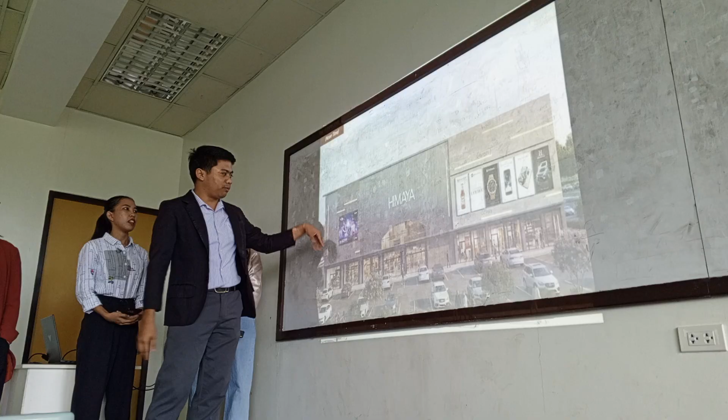So for the next slide, we have it for the night time, which is for the evening. So this is a little bit of information or inspiration about our perspective.

The design of the Himaya building suggests a sophisticated blend of modern industrialism and tropical minimalism, as you can see in its facade. It manages to look imposing yet approachable, bridging the gap between a high-end department store and a community-centric hub. The design of this building is inspired by an industrial elegance concept.

Then over here, as you can see, this is the central glass arch. It is a modern nod to traditional town squares or grand entryways. It breaks the rectangular monotony of the building, acting as the heart that draws the eye inward and showcases the activity inside.

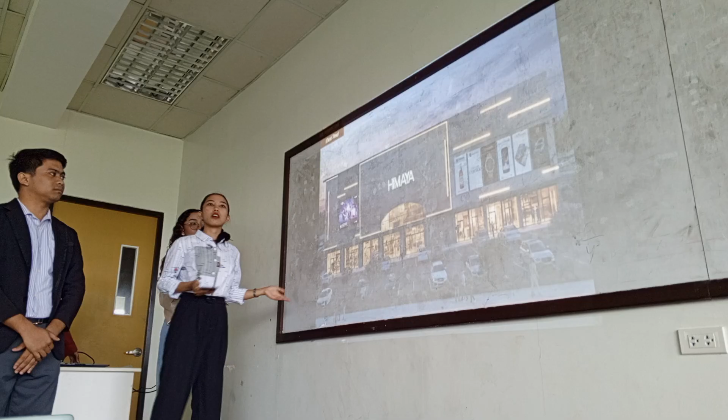For this part, the staggered horizontal light strips are inspired by modern technology and suggest movement. These lights make the building look like a glowing motherboard or a high-tech terminal, suggesting progress and energy.

For the name itself, Himaya is a Visayan or Cebuano word which means glory, praise, or bliss. The bright glowing light and prestige feel of the stone facade align with the idea of something glorious and celebrated. That's how we came up with the overall concept design for the perspective of our building.

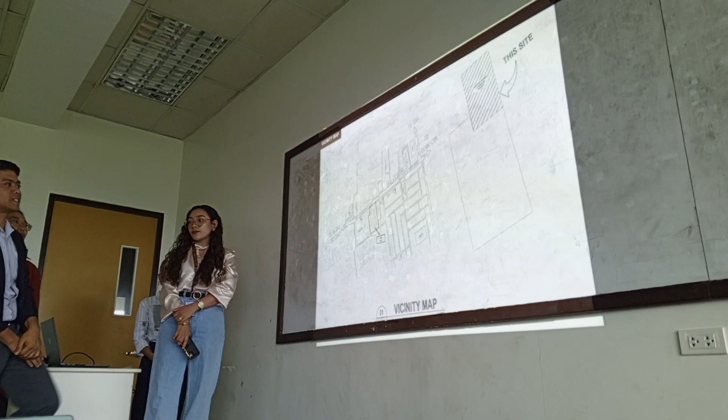This is our vicinity map. It is where our building is located, in the area of Toyota and in front of DGT or Davao Global Township. So why did we choose this?

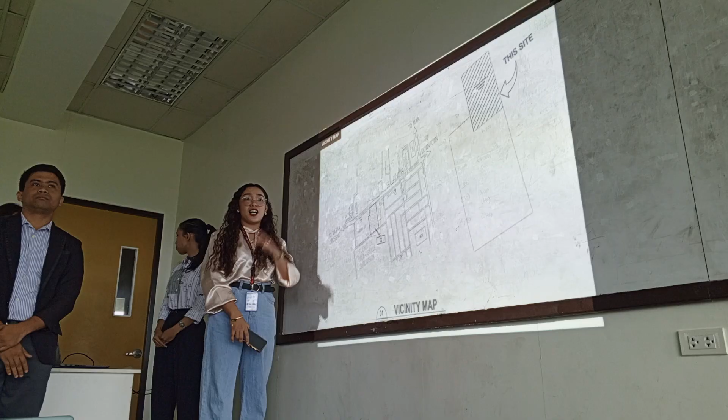It is actually very strategic why we chose that, because putting a commercial building especially near or in front of DGT is significant since we cannot deny that DGT is the growing BGC of Davao City. It is considered a premier, bustling, high-traffic intersection linking the major districts.

As you can see, there are a lot of people going to DGT. This location offers high visibility for the customers. If you are the client, there's no need to spend a lot of money on advertisements because it already offers high visibility and easy access.

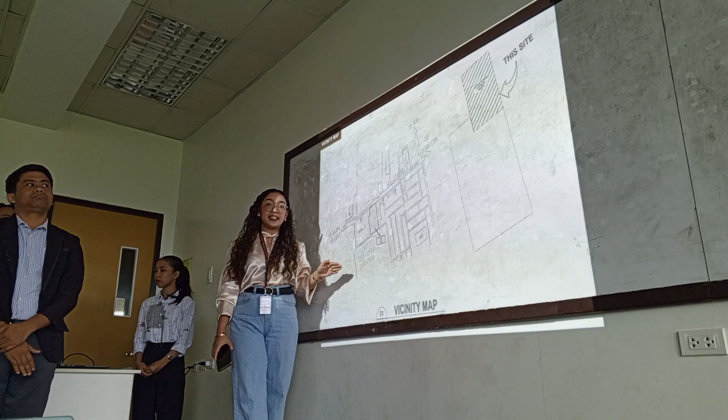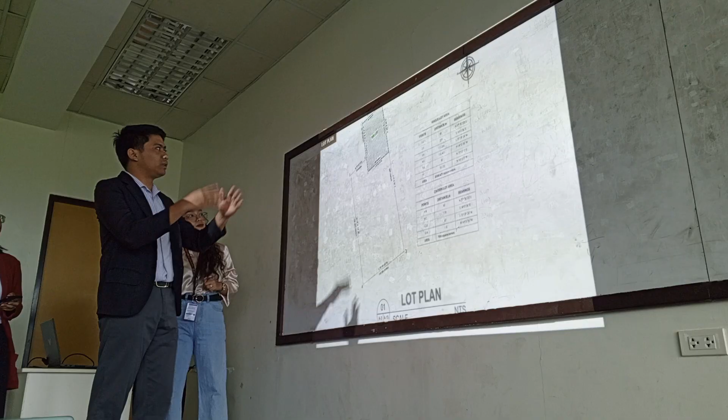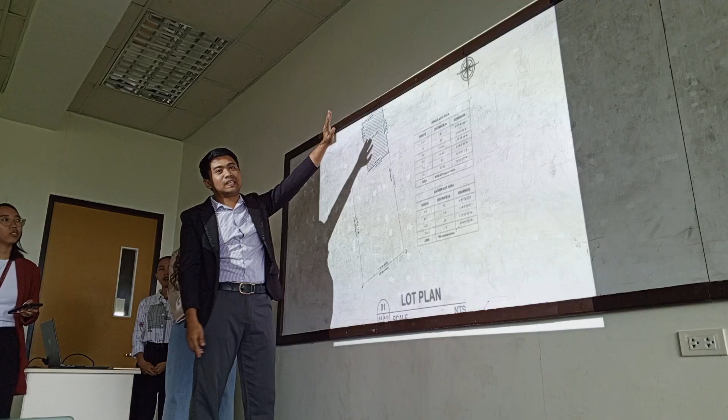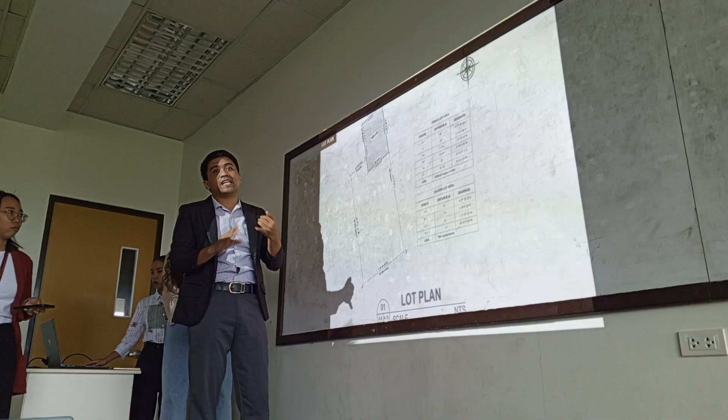Next we have the land. For the land, sir, here is the whole land area. As we can see, the total land area we've come up with is this big, but we've chosen the land area on this part, which is on this side of the vicinity map, near the road shown in the previous slide. And that lot, sir, can be seen clearly if we are riding a jeep or a DC bus.

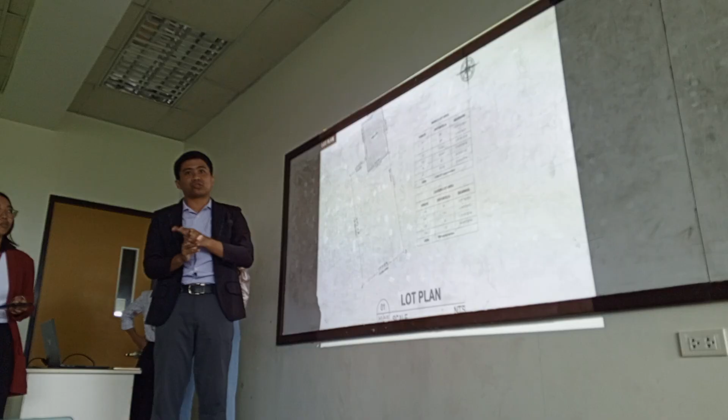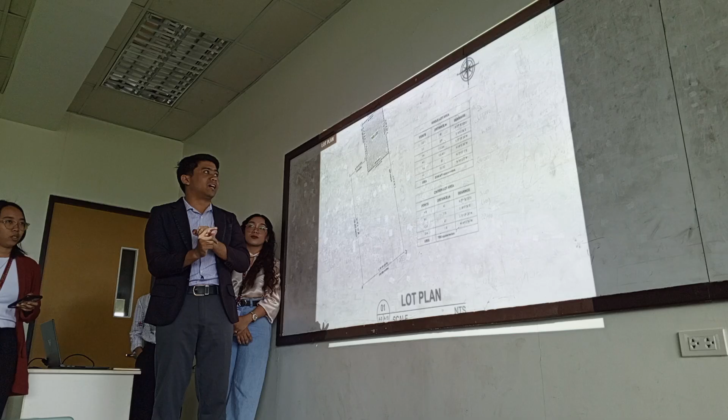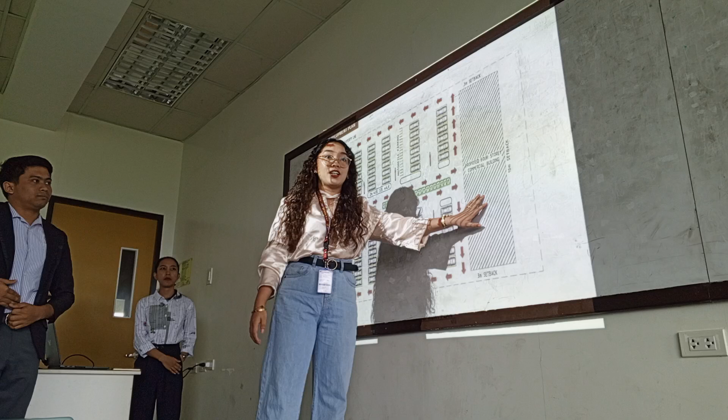Next, we have our SDP or Site Development Plan. This is our proposed four-story commercial building, the building footprint. As you can see, sir, there's a lot of space for parking because we believe that if you want to satisfy your customers and give them a full experience, you need to offer good customer service. We think that prioritizing the parking areas is actually a sign of good customer service.

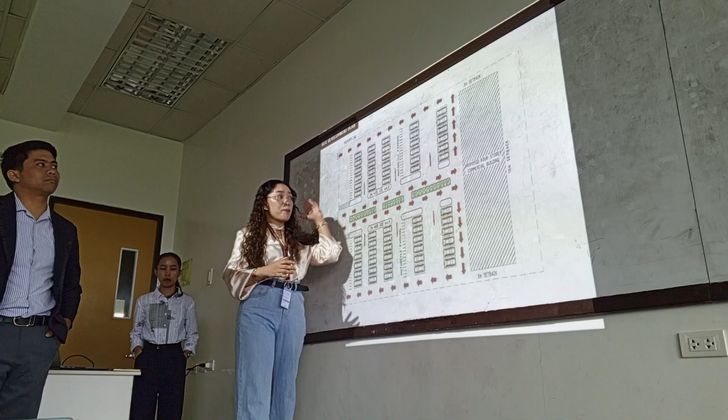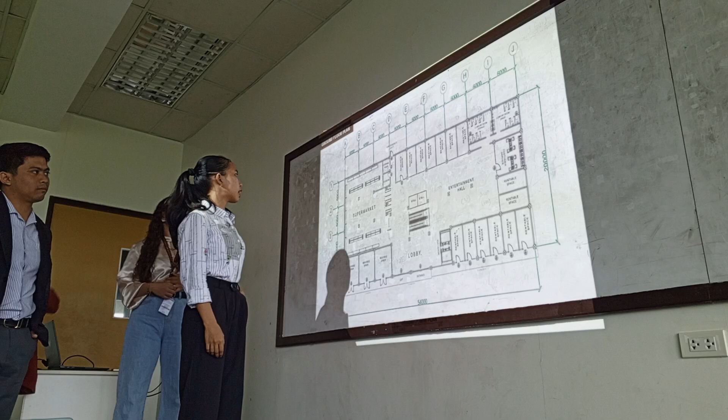So here we have our ground floor plan, sir. Our building has a dimension of 54 meters by 20 meters, so 54 meters in the front and 20 meters on the side.

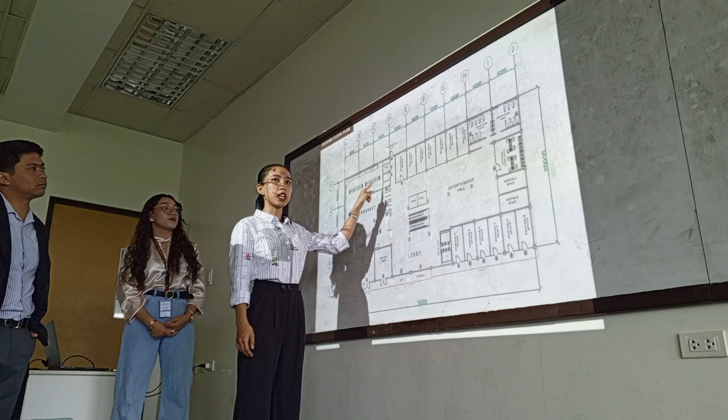The ground floor comprises some rentable spaces varying in different sizes. All in all, there are 20 rentable spaces. We have our supermarket, our storage room, and our EE and ME room. We also have an open space that serves as an entertainment hall.

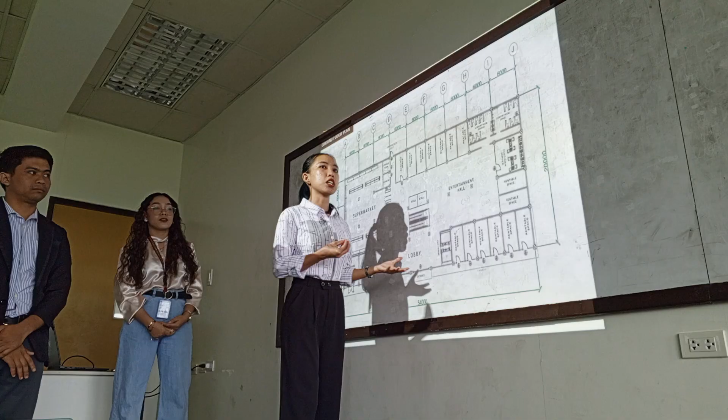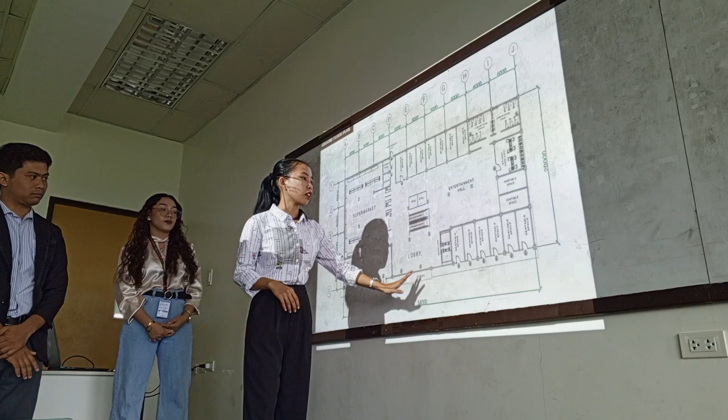In this part we have our elevator. We put it right in front of the building for easy access, especially for persons who will use it, for example PWDs and senior citizens. So it's really easy because it's right near the entrance.

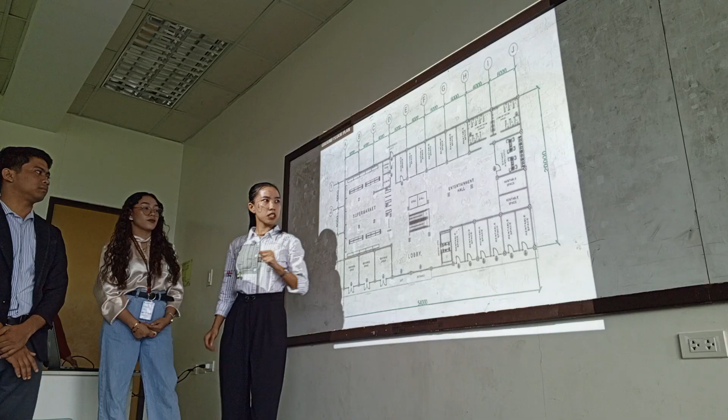Over here we have our customer service room, our rentable spaces, and of course our common toilets for both male and female. By the way, I forgot, we also have one emergency exit for the ground floor.

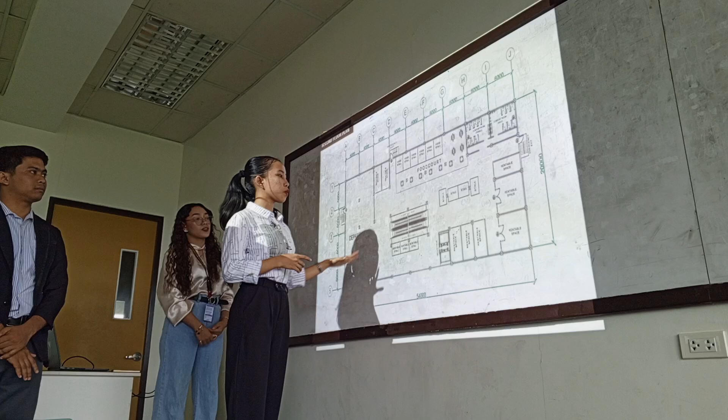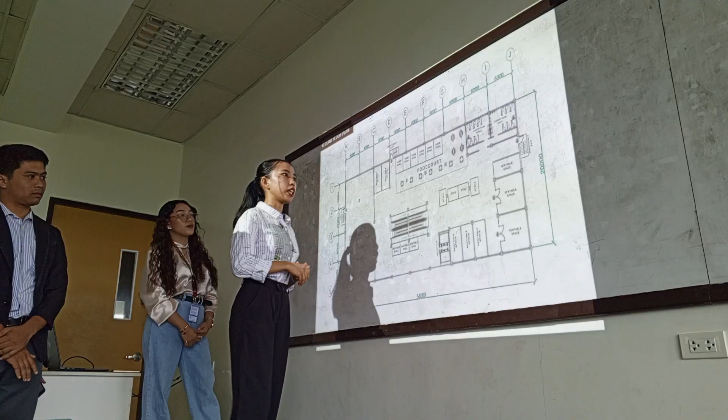Next, here is our second floor plan. This floor comprises a department store, and we have our food court with 6 food stalls, and also rentable spaces and stalls for merchants. There is also our common toilet, and for this floor area we have 3 emergency exits.

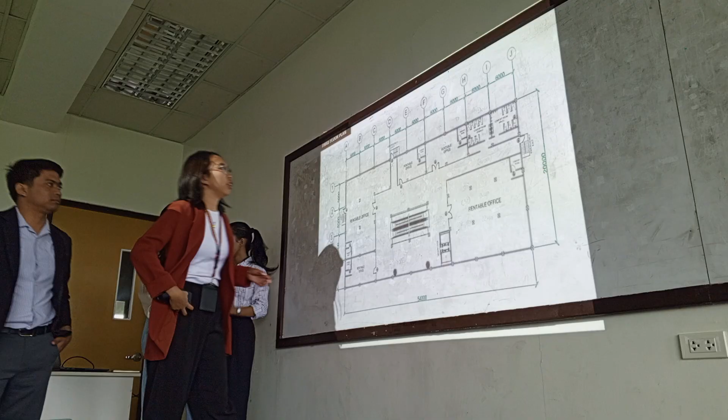Moving up to the higher levels, the third and fourth floors cater to professional offices and boutique business spaces. This layout prioritizes productivity and a quieter environment while maintaining easy access for the client.

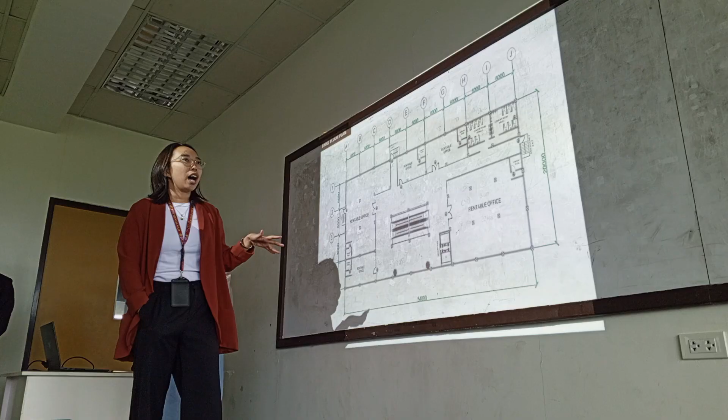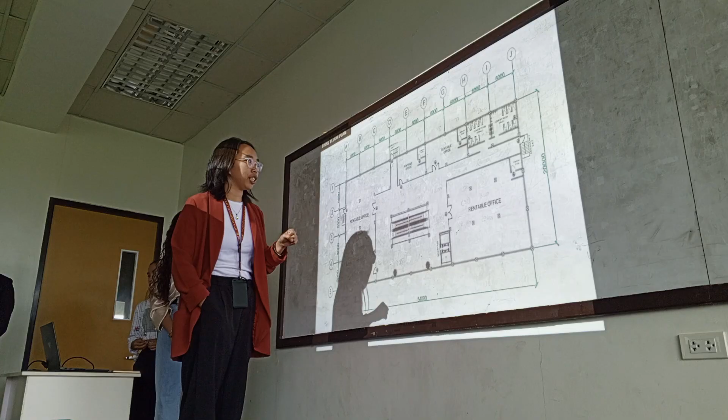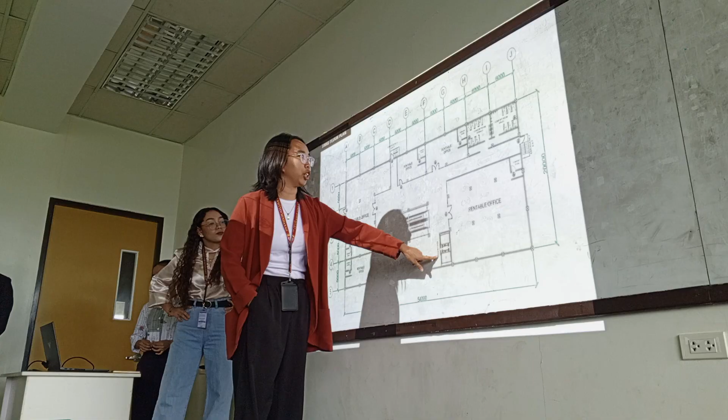In the third floor plan, this is the primary hub for professional services. We optimized this layout to provide varied space units that can accommodate clinics, law firms, and other corporate offices. Notice the centralized hallway system, which ensures efficient foot traffic and easy access for navigating to the elevator. In this floor, we have 3 emergency exits.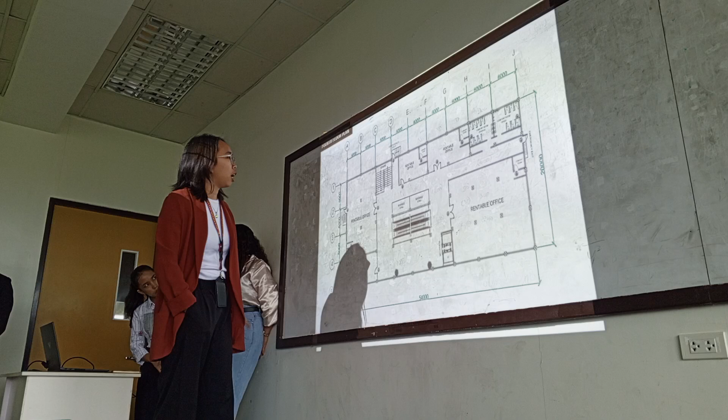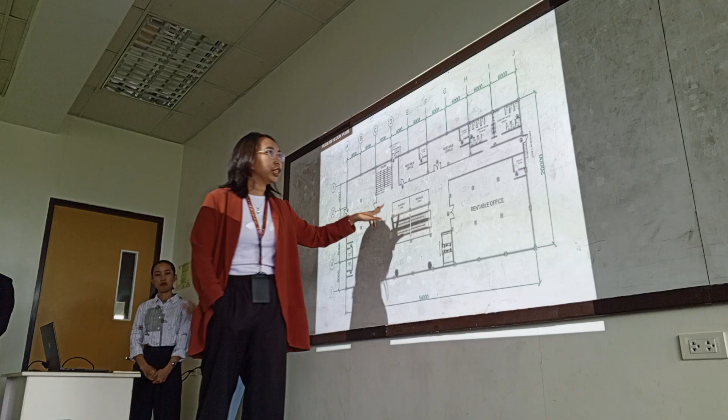The fourth floor plan offers the most premium spaces. There are 5 rentable spaces which can allow one large tenant to occupy the entire floor, or we do modular partitions. The tenant can change the whole area, or it can be subdivided into different units.

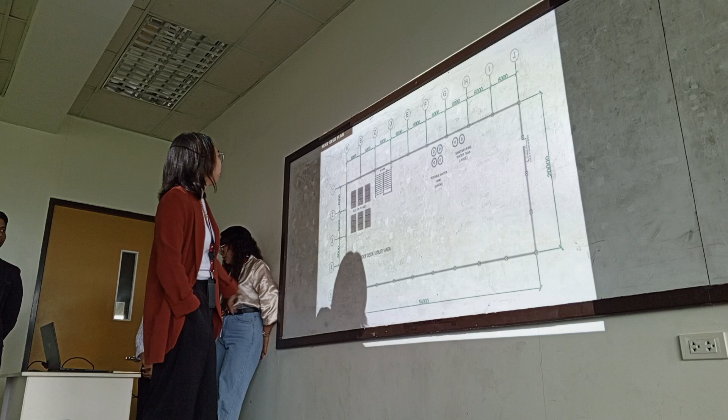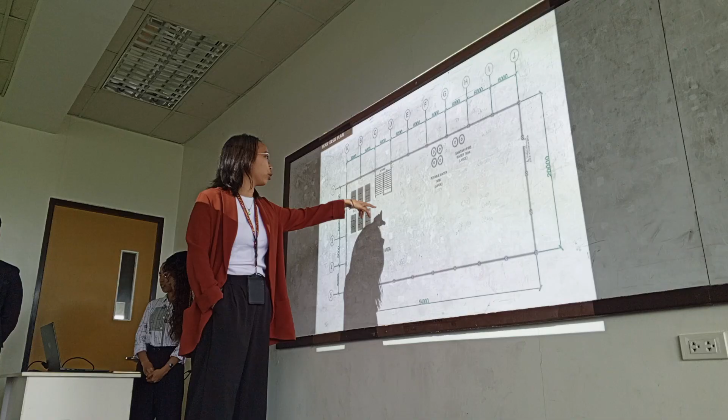Next, for the rooftop plan, this is designated for our centralized water system, for the potable water tank or the sanitary water tank. We also have the stairs going to the fourth floor, and it also has one exit.

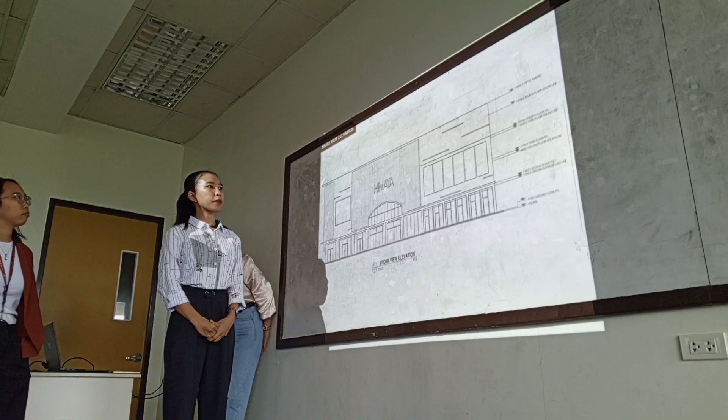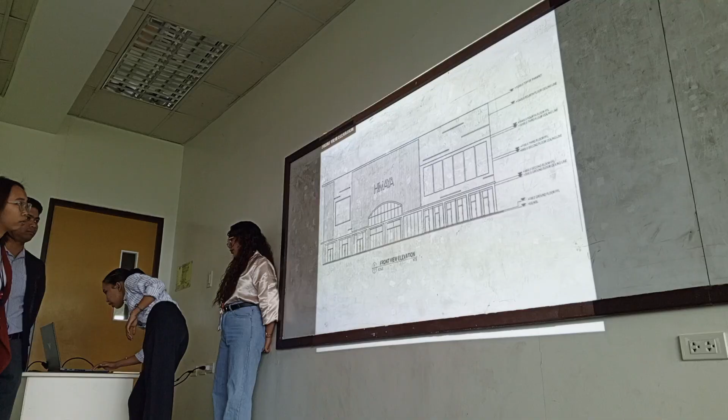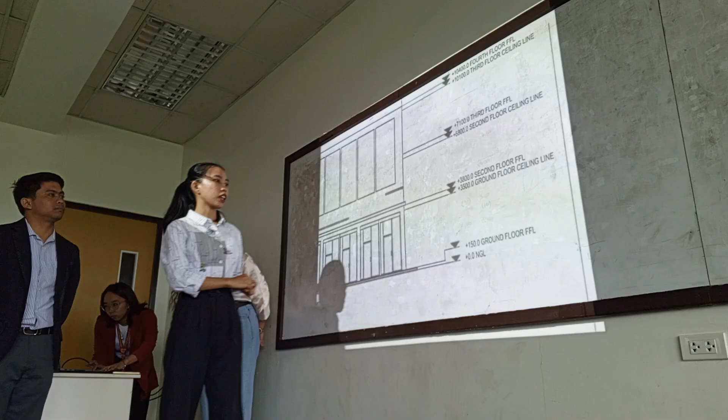Here is the example of the front elevation for our building. You cannot see it properly, sir, but this is a 150 mm ground floor finished floor. This is the distance from the natural ground to the foot of the building.

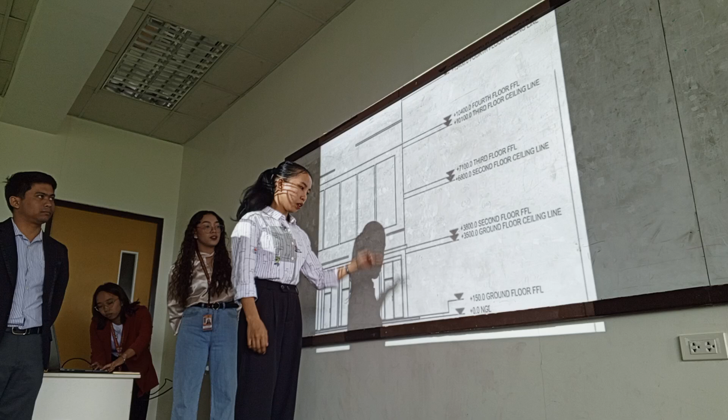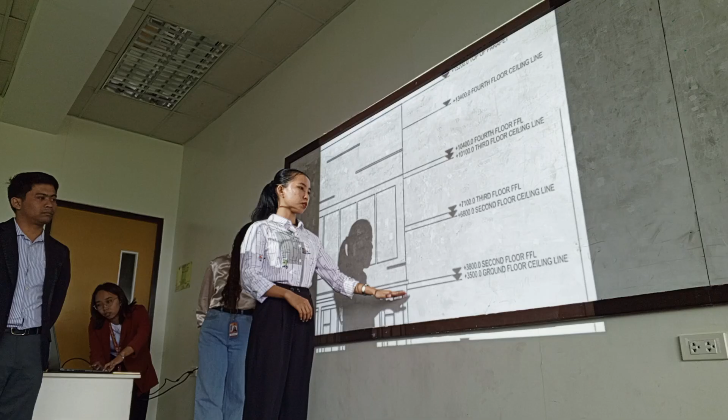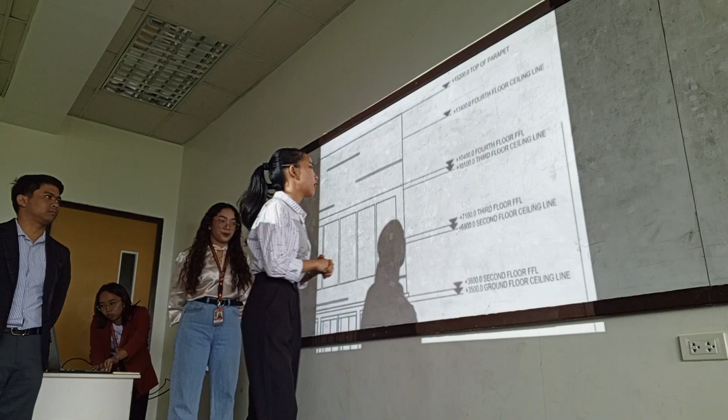For the first floor, it is elevated 3,500 mm from floor to ceiling, and then we added 300 mm for the slab and beams for the second floor finished floor line. From second, third, to fourth floor, it has an elevation of 3,000 mm. At the top, we added 1,500 mm for the parapet, and that's all for the elevations.

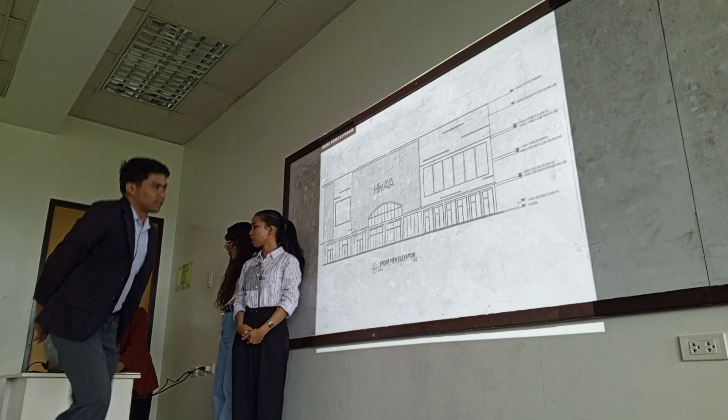At this point, I'm going to talk about the schedule of doors, sir. As you can see here, we have 7 types of doors.

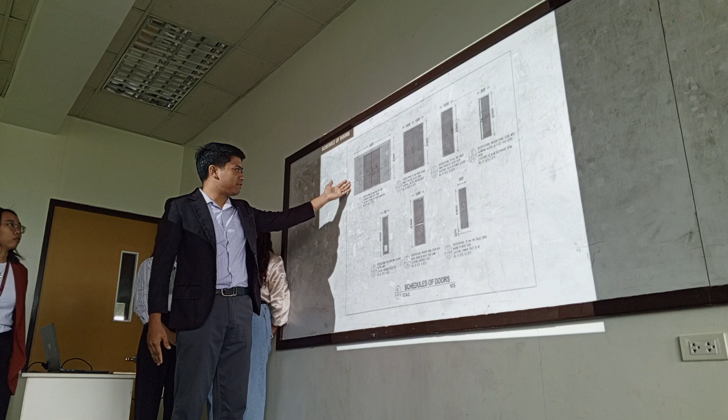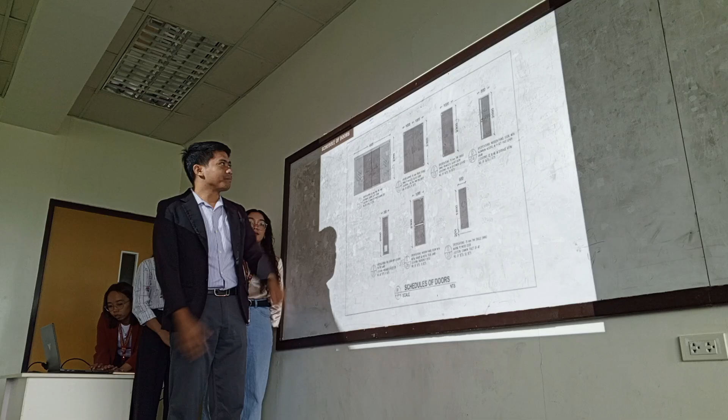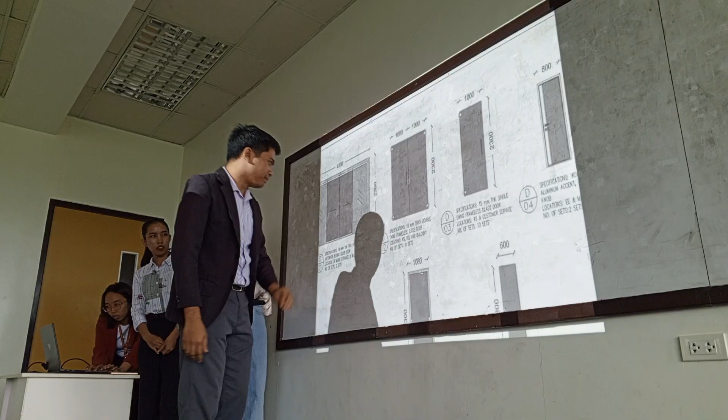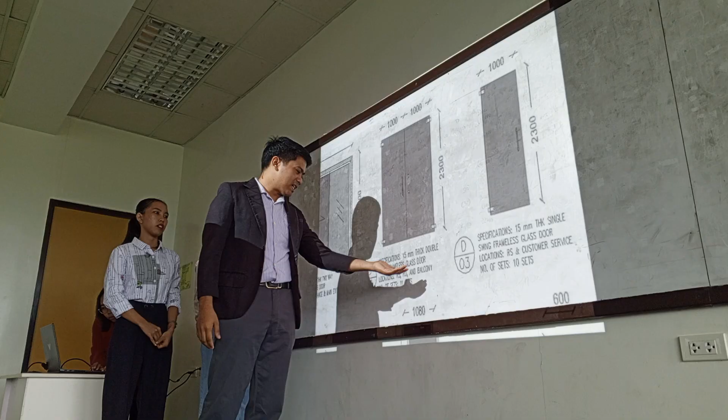First we have door 1, which is located at the front of our so-called Himaya commercial building, and also at the back. For door 2, this is the swing frameless glass door, located at the rentable offices and rentable spaces. We have 11 sets of this.

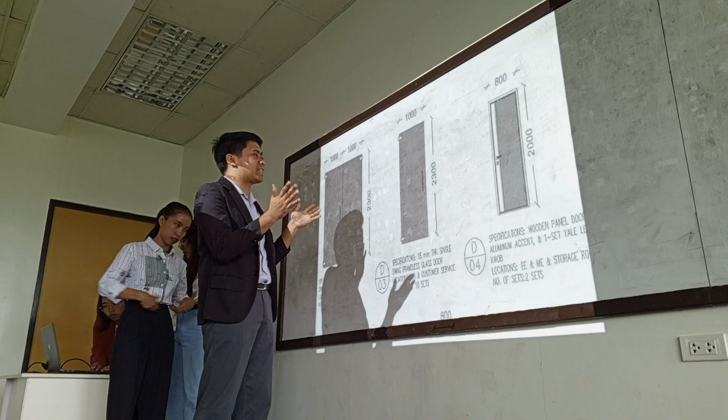For door 3, we have the swing frameless glass door, following the measurement of 2,300 mm by 1,000 mm, located at the rentable spaces and the customer services on our ground floor. We have 10 sets for that one.

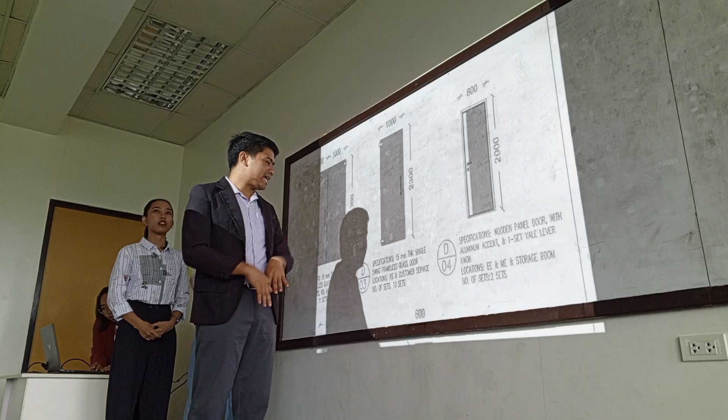We also have the so-called wooden panel door with aluminum accent and 1 set Yale lever knob, located at the electrical and mechanical engineering storage room. We have only two sets of these doors.

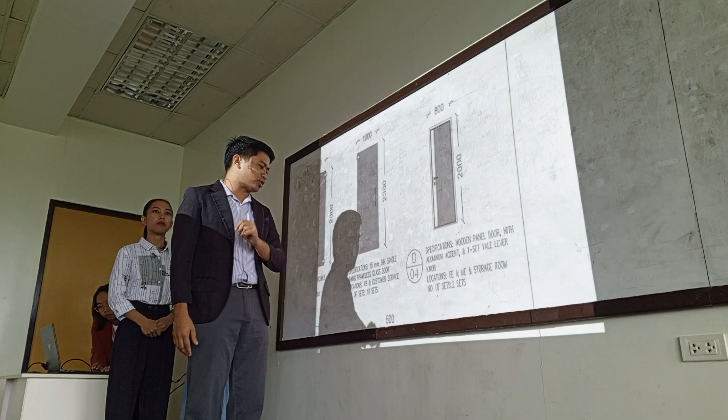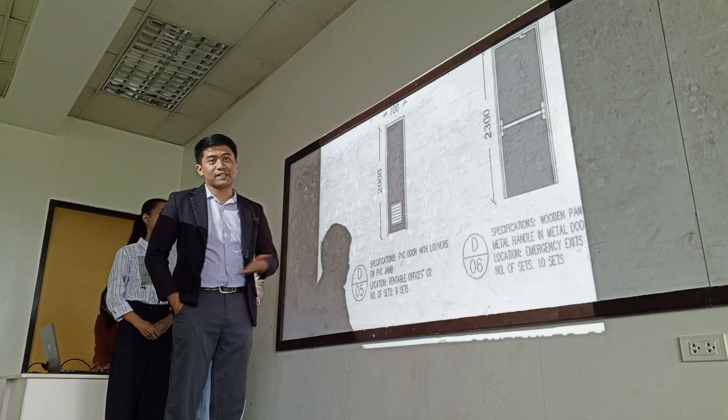For door type 5, we have the PVC door with louvers on PVC jamb, which can be seen in our rentable offices, and also in the comfort rooms of our rentable offices. We have 9 sets for that one.

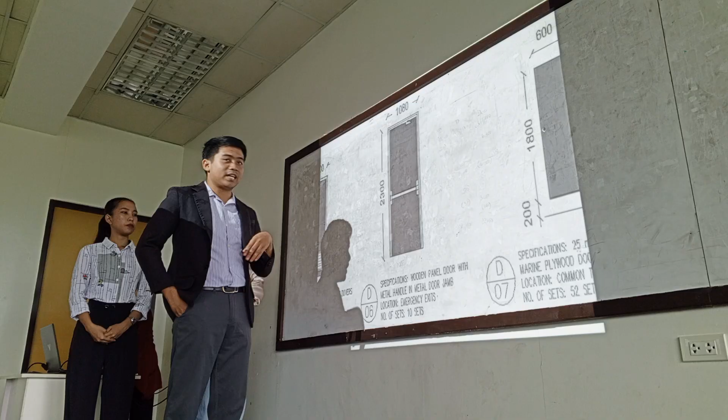For door number 6, the panel door with metal handle and metal door jamb, which can be located or seen in our emergency exits, we have 10 sets for that one.

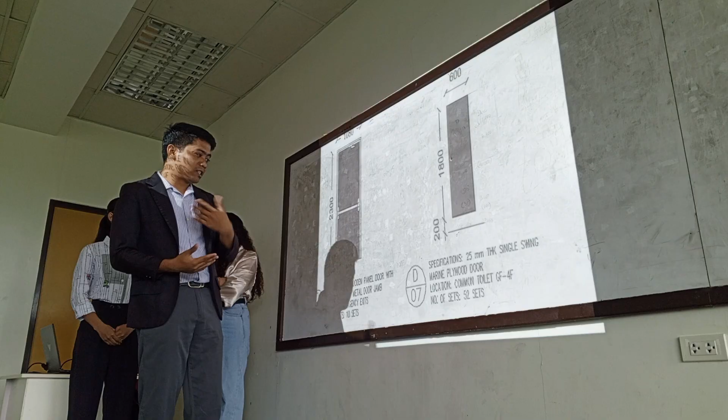For our last type of door, the marine plywood door, single swing, which can be seen on the common toilets, there are quite a lot. We have 52 sets for that one.

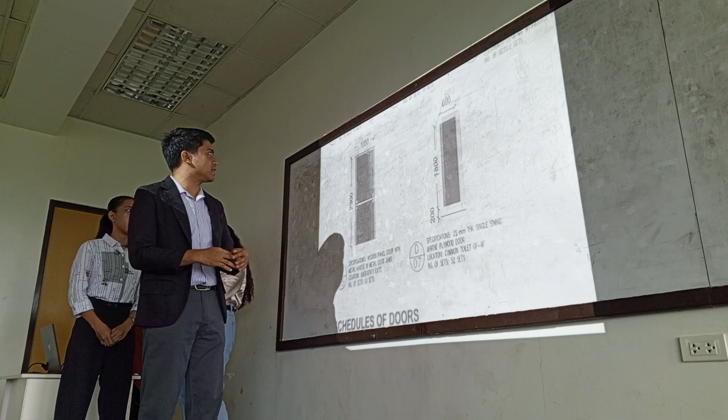So for the schedule of doors, we chose these so that our customers, sir, can appreciate the different types of doors that we have. So that's it for that, sir.

Our building, Himaya, offers diverse services from rentable spaces, offices, supermarkets, and etc., that will surely pull a lot of diverse customers, from customers that work in offices, students, and etc. So that will be all.